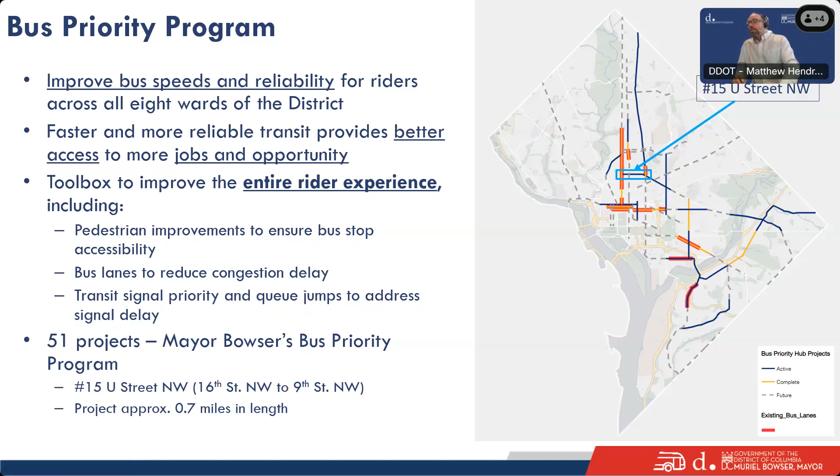And then one last little piece as far as this particular corridor. The corridor itself is 0.7 miles in length, but we have some exciting news here. How it's scoped out originally, the project limits were from 16th to 9th, and we're hoping to grow that a little bit more.

Why is it important? Saving time just means you can use it however you like. Time is the ultimate, most valuable commodity that we have. How you spend that time is up to you. But I think a pretty good number one is it gives you time to be with ones that you love. It means you're spending less time on the bus.

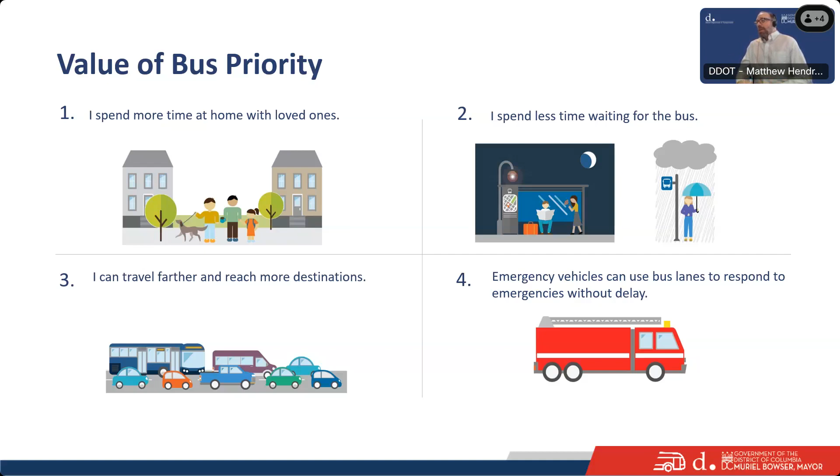Bus lanes really do allow them to get to where they need to go without delay. Again, just reiterating why bus priority is important: increasing speed and reliability for our buses, making it safe for everyone on the roadway, not just people who ride the bus, whether you're walking, biking, or driving. There's a lot of benefits for everyone on the roadway.

U Street has some really important needs for pickup and drop off. We know it's a busy nightlife corridor, with a lot of restaurants, bars, freight pickups, deliveries, and a lot of people trying to get out of there late at night, which means some unique challenges. And then, obviously, a commercial corridor.

Our original limits were to 16th Street, and tonight we're announcing that we're extending those project limits to 18th Street. DDOT is also working on a streetscape project on a slightly different timeline than ours, going from 18th to 14th. We wanted to parallel that to make sure we have a seamless corridor, so the look and feel is consistent with what we're working on with the bus priority project.

Outside of those limits, the bus priority team is also working on the Florida Avenue bus priority project. Speaking of seamless corridors, we're extending that project from 9th Street Northwest all the way to 1st Street Northeast, where we have the current reconstruction project of Dave Thomas Circle. So all of the 90s buses traveling along this corridor will be impacted by these projects, and we're hoping to provide a lot of those benefits by attaining these goals through bus priority.

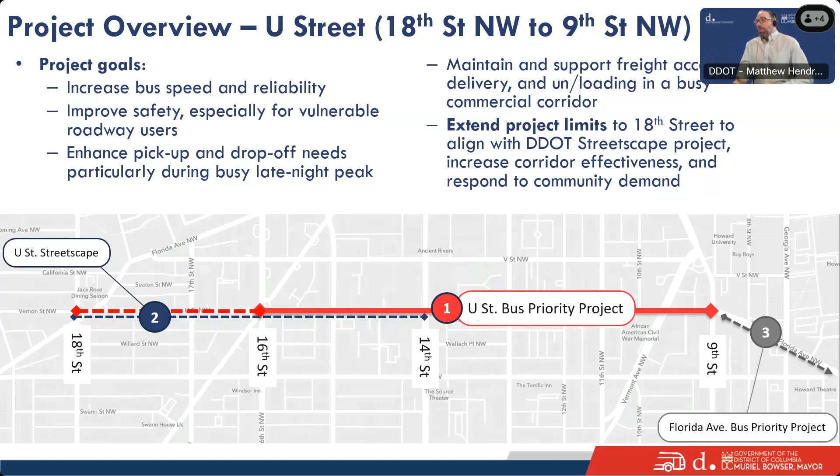The 90, 92, and 96 run all through this corridor. This is one of our highest ridership corridors. You can see how many people are riding the bus - that's a lot of people for the district, for WMATA, and for our bus routes in general. It also intersects with the Green Line, as well as the 70 buses, which are the highest ridership routes at 7th and Georgia. So, extending those limits from the Florida Avenue project, about a third of those people are getting on or off within this project area.

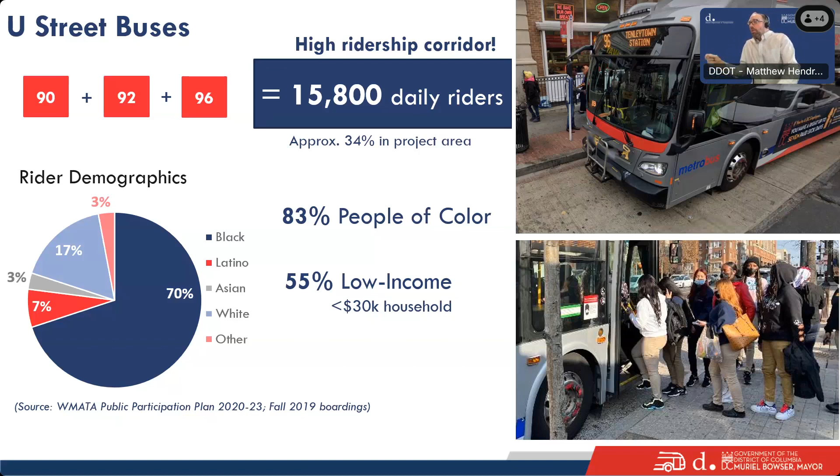So who's riding the bus? 83% people of color, as well as 55% self-identified as low income, making less than $30,000 per household. So it's a major equity issue to make sure we're delivering on quality bus service.

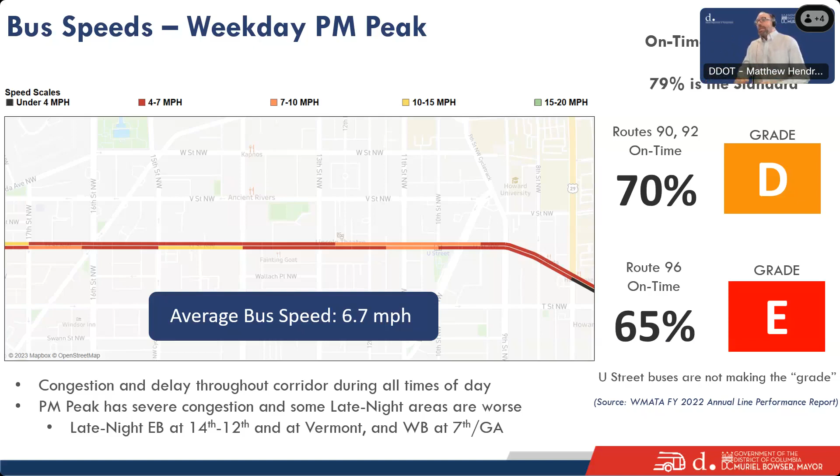Again, on the right, some numbers from WMATA. Their on-time performance standard is 79%, and all of the buses within the U Street corridor are just not making the grade. So we need to do better.

And to do that, we needed to hear from you. So we kicked off a public presentation in late March with ANC's 1B, 2B, and 2F.

We've gone out to all the businesses and residences. We've flyered, we've hung posters at bus stops. We've talked to businesses. We've had several different safety walks and transportation walks to highlight the issues and areas of concern or where things are working well.

And we've done this throughout all times of the day. So we've done this in that AM peak, that PM peak. We've gone out with a lot of you I see that are on the call for in the evening, as well as late at night.

We had our first late night walk, and a big shout out to the Mayor's Office of Nightlife and Culture, as well as the Nightlife Task Force, who helped organize that, bringing people together, going out 2 Fridays ago on the 8th, where we had a big lightning storm and rainstorm. It was a memorable experience. I just wanted to say thank you to everyone for coming out there.

We've also been collecting comments through our website as well as our email. You will have our team's email at the very end, but you can always reach us there.

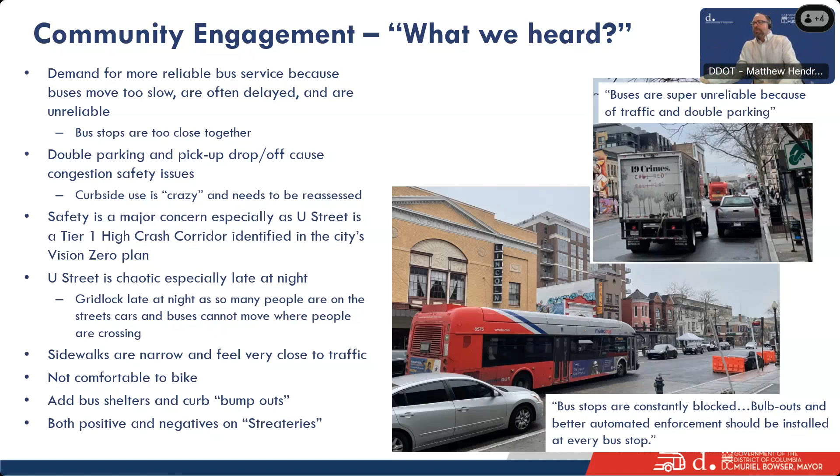To improve our bus service through the U Street corridor, these are the tools we have recommended for this project. Within our toolbox, we have over 20 different types of tools, but these are the ones you're really going to see defined in the concepts. It doesn't mean we're limited to this, but this is what came to the top to address all of these concerns.

The first is our offset bus lanes. We're going to talk more about how we evaluated and came to the conclusion of the offset bus lanes. The dedication of having a bus-only lane really can help us move those buses and get them out of congestion, so we're going to keep them moving with the offset bus lane.

When we came to you at the beginning of the year, we talked about the potential of using curbside versus offset. We really fleshed that out, but because the curb use is crazy, it really was a non-starter for getting buses to the existing curb line. It's necessary for them to be away from the curb so that pickup and drop-off activity can continue, and those streeteries can remain if they want to. We also have existing curb bump-outs that the buses already need to move in and out of, which we'll talk more about in a moment.

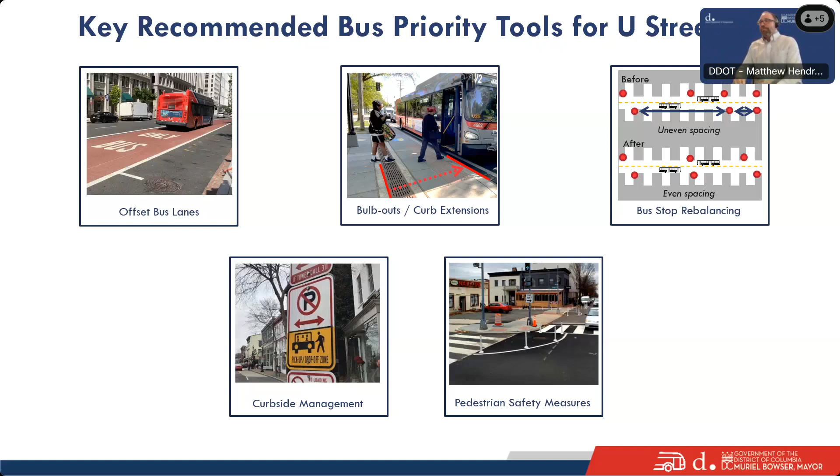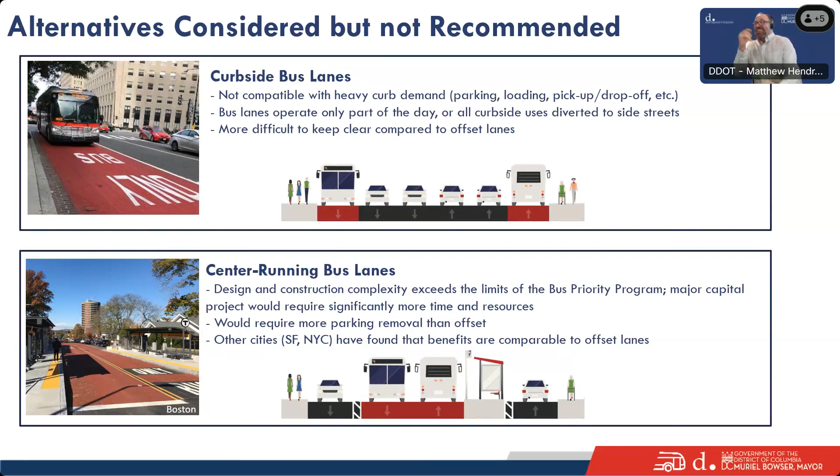Okay, do we need a drum roll? Do we need a drum roll? Okay, we're gonna start giving you guys some pictures of our initial concepts. I'm gonna make you wait.

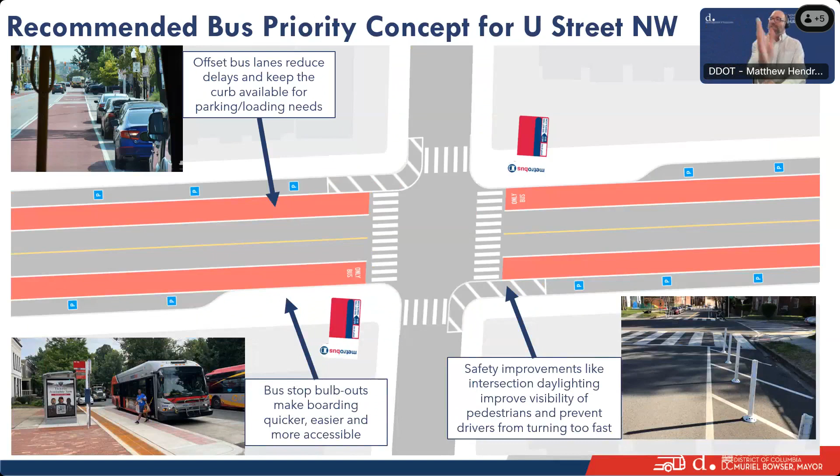We have a couple other icons where we're moving a bus stop within the corridor or removing it. That's what you see at that top right. We have 2 bus stops at 17th.

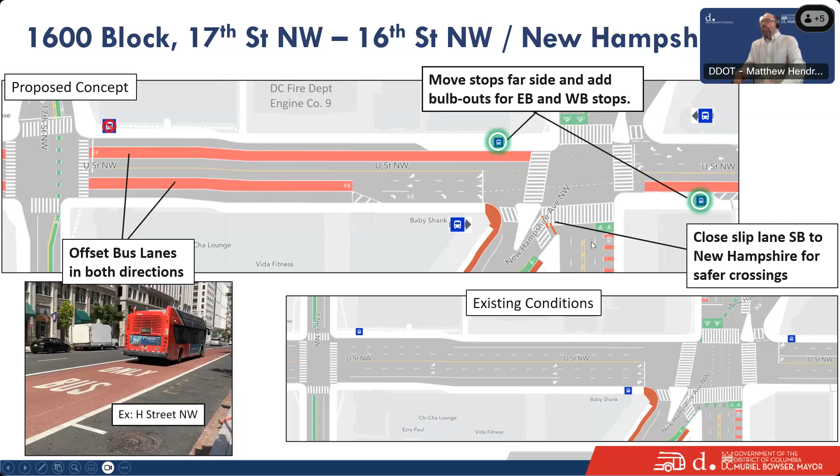And then again, another example here on H Street, what it looks like from our toolbox. And then we've made one other proposal here in New Hampshire, and I'm going to talk about that here in just a second.

All right, so I'm going to bring that intersection up next. We have one closed slip lane, and I think David just mentioned those high-speed turns. We've already made one closure there for safety concerns.

We're going to propose to do that again on that angled crossing on the south side of New Hampshire. So you cannot make a left off of U Street into that angle southbound on New Hampshire on the south side of U Street. People will have to drive around the block to make a right turn to access that off of U Street. But we've just heard so many close calls, and this intersection being so wide, people are getting run into or having a lot of close calls as they're literally crossing the street in a crosswalk. So we wanted to minimize those conflicts as much as possible to add an additional safety benefit for people walking.

As we go further east to 15th Street, again, we're removing those stops at 15th and balancing that so we're having them every other block rather than every single block.

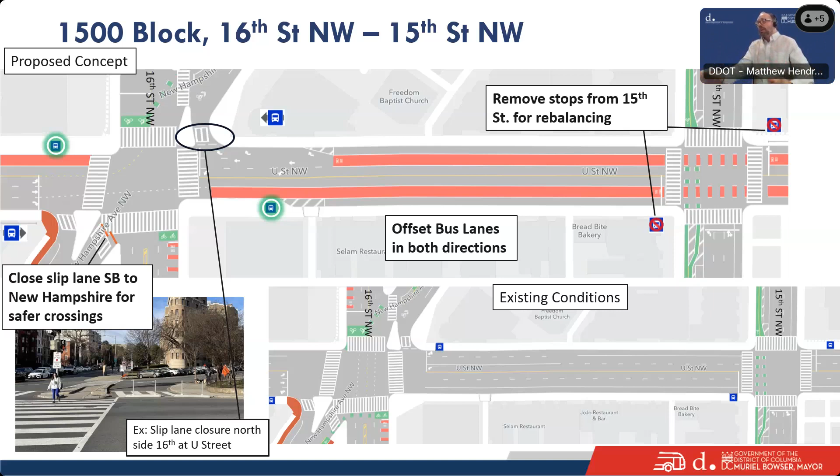Okay, and here we are going to be, as we go east of 15th, adding a right turn pocket. Again, that will help us with having buses get through the intersection. A lot of times what we've seen, especially when there are a lot of people on the street, cars are now queuing up to make that turn. We're going to make sure the bus doesn't get stuck in that queue and that we get them through that light cycle.

We have an existing curb bump out on the south side at 14th Street, and so here we've proposed leaving that bus stop where it is. We have a lot of curb space there, much more open, and we do have a bus shelter there. It doesn't mean we can't move that at some point, or move the shelter, but with the existing resources already there, we're going to take advantage of that and have a shared right turn so that bus lane will then be allowed to open up to cars for them to make that right on 14th.

However, on the other side, on that north/westbound side, we're moving that stop from the near side to the far side and adding that curb bump out to accommodate bus service.

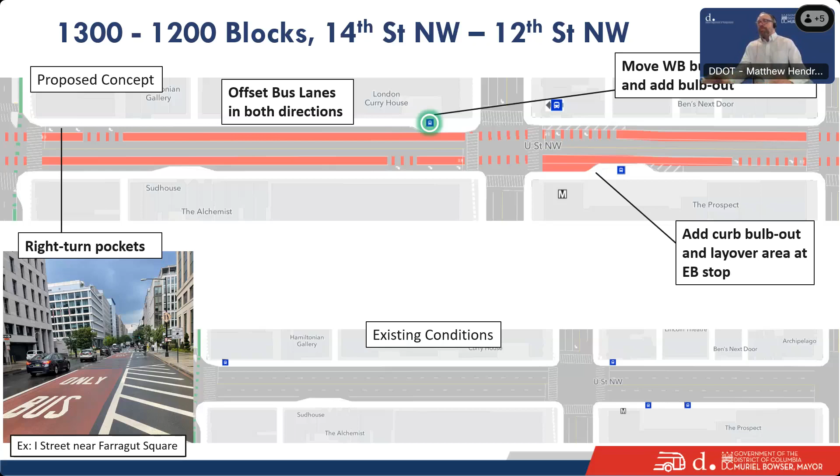All right, we're going to go to Vermont Avenue, keep this moving. Again, things you've already seen before, but we're also having that second access to the metro stop at 10th, where we have an existing bus stop. We're also proposing to remove the bus stops at 11th, making sure we're balancing those out, and then moving near side stops to far side, what you see on Vermont, getting that stop on the east side of Vermont going westbound, and moving that to the crosswalk at the metro station along with a curb bulb out.

And then all through that, just because of the narrowness of the space, we would have a shared right turn through both, accessing Vermont and 10th. We'll continue to work out those dynamics with our engineering team. From that westbound, we do not have a left turn. However, for the eastbound, we're maintaining that and keeping that left turn to go north on Vermont.

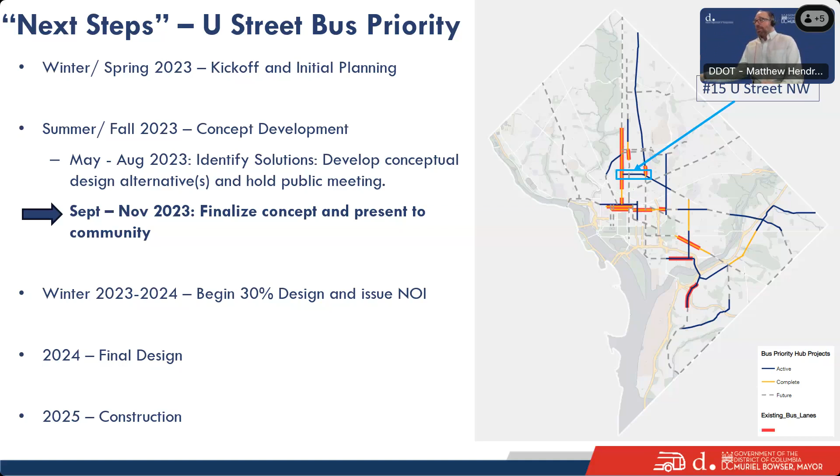So that's all very exciting, and I'm looking forward to the conversation.

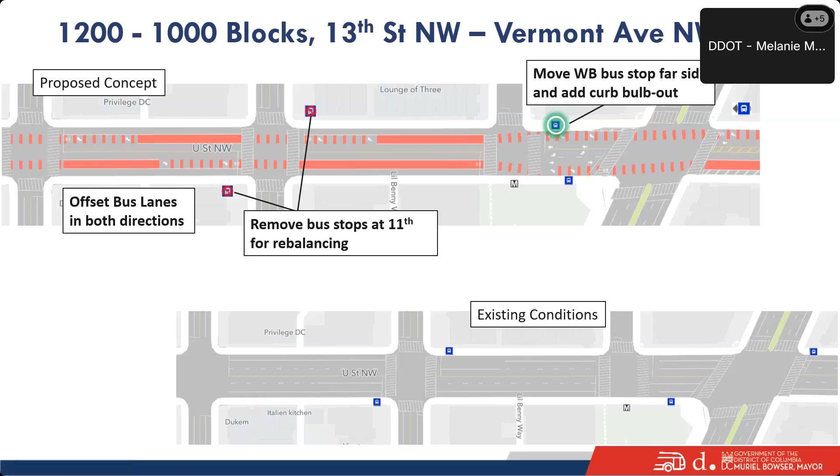I guess I have three comments. The first is the intersection at 18th Street is already problematic for buses, pedestrians, and vehicles. So I don't know whether you've given thought to how you're going to clean that up in order to make the bus turns both up 18th and then the very sharp turn from 18th Street onto U. I hope you're going to be looking at that and coming back to us in your next plan with something about that intersection and how to improve safety and user efficiency there.

Second comment: I know there's a parallel project, which I think DDOT is also in charge of, that has to do with bike lanes. I think DDOT handles bike lanes, and I'm anticipating there will be many questions at our ANC about where the bike lanes are. So I'd be interested to know whether you've given that thought. While I know you're working primarily with buses here, the bikes got to go somewhere, and certainly where there are buses and bikes coexisting, say down on L Street, neither the cyclists nor the pedestrians are particularly happy, and I imagine it's going to be a problem for the transit vehicles as well.

Third point, I was pleased to see in one of the slides that you're going to have traffic enforcement for cars that are in the bus lanes.